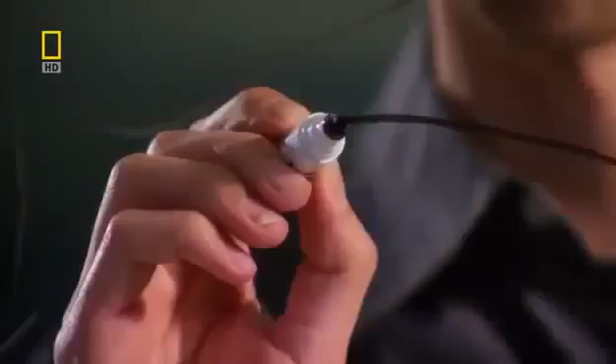The architects look for inspiration in Abu Dhabi's landscape. They find it in the wind-swept dunes and the rolling waves of the Persian Gulf. We took this idea of wind and water, which are both dynamic, fluid type of rhythms of nature, and we said, how can we capture those in time? As a result, you get a much smoother phase.

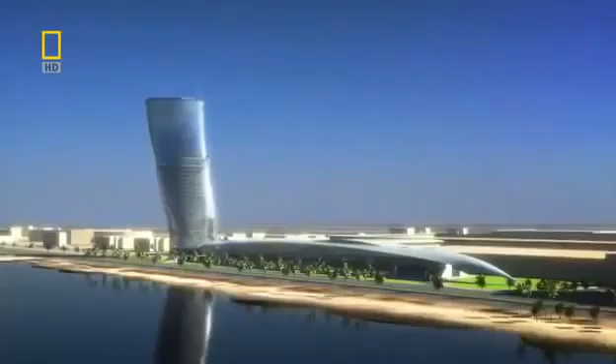I was really very happy when we first saw it, because with such a building, you get the first impression from the first few seconds. The team come up with an extraordinary design. A tower that spirals out of the ground to 160 meters. Inspired by a desert whirlwind and the splash of a wave rising over the sand.

This gravity-defying skyscraper tilts almost 5 times more than Italy's Leaning Tower of Pisa. No single angle of this tower is the same as another. It's a structure guaranteed to amaze. We really wanted this to happen. They could see a vision suddenly. They could see something that would stand for them. Then there was no stopping us.

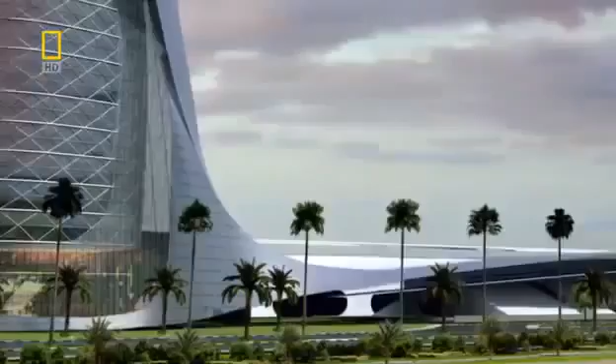Sheikh Sultan wants the lower floors to become the most prestigious office address in Abu Dhabi, with the top 18 levels assigned as a 5-star hotel fit for royalty. But for maximum impact, this landmark skyscraper also needs a prestigious location.

The Sheikh decides the tower will stand next to a monument of national importance, the Grandstand. Built by his uncle and founding father of the United Arab Emirates, Sheikh Zayed, it's used to this day for national celebrations. This monument and the skyscraper will link Abu Dhabi's future with its past.

Over the past 50 years, this land has experienced extreme change like no other. The discovery of huge oil reserves in 1958 set the wheels of progress in motion. Abu Dhabi's ruler, Sheikh Zayed, had a vision to unify the sheikhdoms and secure their financial future from Western dominance. He then set about using his black gold to create a city that rose out of the desert.

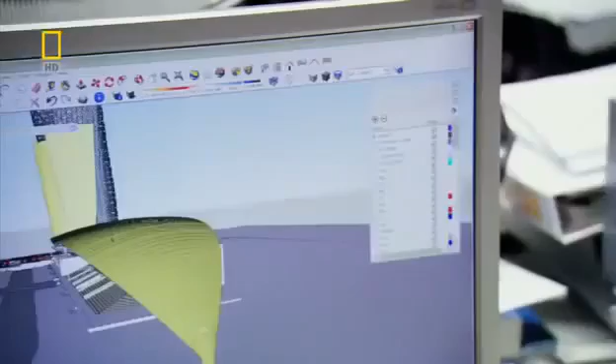Now, the idea must make the leap from the drawing board to the construction site. The only problem is, no one has ever attempted a skyscraper like this before. Everyone realized that this is a crazy structure to build, and how are we going to build it? To make Capital Gate's gravity-defying design a reality, it'll take some extraordinary engineering, and the challenge begins on day one. Its top floors overhang its base by 33 meters, creating huge forces that want to rip the building's foundations out of the ground.

At the construction site, project architect Tony Archibald is daunted by the task ahead. When I first joined the job, I was shown the drawings, and I kind of did a double take, and I wasn't quite sure that I got the correct understanding of the project, and it took me a few moments before I realized what we were about to undertake.

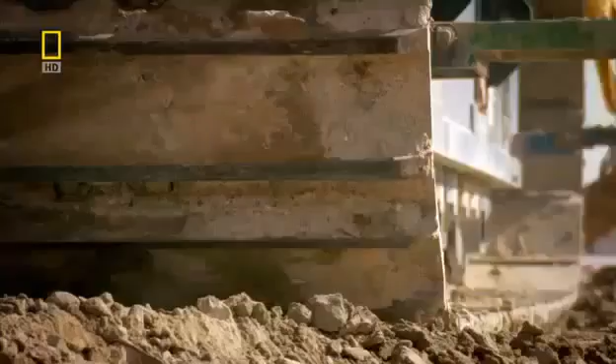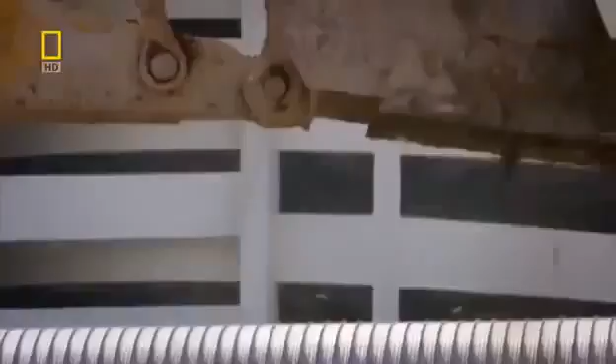Keeping Capital Gate upright is a huge engineering challenge. There isn't just one solution. To overcome the forces of gravity, it will take a whole range of pioneering techniques. But the task starts with the foundations, deep underground. On one side of the building, the weight is going down into the ground. On the other side, it's being lifted out of the ground. And that's due to the large overhang that we're having to deal with.

The solution requires almost 400 concrete piles that work in 2 different ways. On the leaning side, half of the piles push the overhang's forces into the ground. On the opposite side, the remaining piles anchor deeper into the bedrock. They resist the stretching forces, trying to wrench the building out of the ground. Finally, to evenly distribute Capital Gate's forces into the piles, a deep concrete slab reinforced with steel is laid on top. What the foundations taught us is that every single aspect of this building has to be custom engineered.

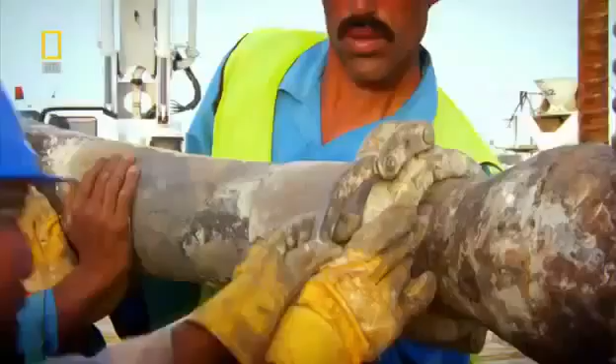Excavators dig out a colossal 6,000 cubic meters of sand. And over 8 weeks, hundreds of piles are driven into the ground. We had an awful lot of piles to put in a very close proximity. It was a real difficult challenge. There can be no let-up on this schedule. Sheikh Sultan wants Capital Gate complete by an impossibly tight deadline.

In less than 2 years' time, Abu Dhabi will host the World Future Energy Summit. Over 3,000 delegates from 50 countries and the world's press will convene at the neighboring Abu Dhabi National Exhibition Center. It's the perfect opportunity to showcase Capital Gate and prove Abu Dhabi is at the forefront of innovation.

But this gives the team just 24 months to design and build a unique skyscraper. With the foundations finished, building above ground can begin. But because of the dramatic lean, it will have to be constructed in a very different way to a conventional skyscraper. We realized once we'd done the foundations that this was going to be the first of many difficult problems. A normal skyscraper requires a solid core to hold it upright. But Capital Gate's curves will just crack and topple a standard core. Engineers must discard conventional thinking and devise a way to defy gravity.

Inspired by the nearby desert landscape and its wind-shaped dunes, architects have designed a curved leaning tower. But it'll take some audacious engineering to stop Capital Gate from falling over. Normal skyscrapers are built around a slim vertical core, which helps to channel the building's weight into the ground. There's so much overhang on this building, meant that a conventional core, there was no way it was going to work. You just can't build a straight core. It's just not strong enough.

Capital Gate's design would cause a conventional core to bend dangerously. The pull of the massive overhang wants to stretch the core on one side, causing the concrete to tear apart.

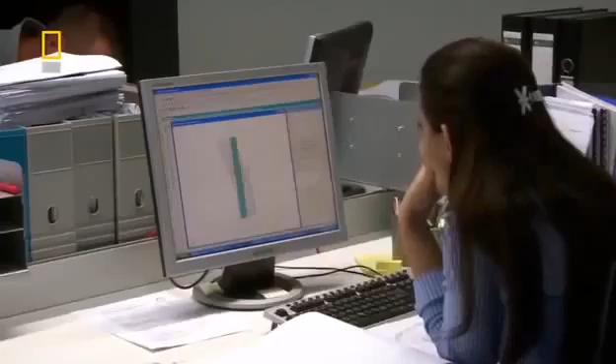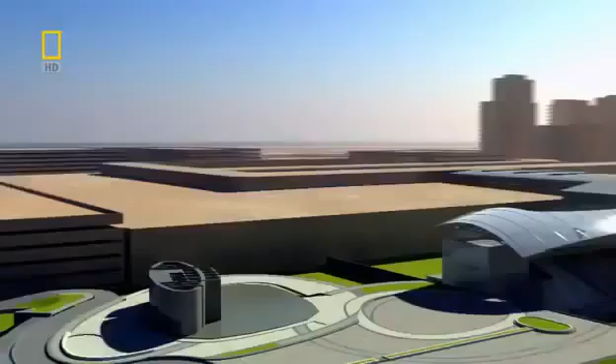The engineers developed two groundbreaking solutions. The first part of their plan is to build the core with a curve, bending in the opposite direction to the building's lean. As the structure grows, its weight pulls the core straight. In total, it shifts 350 millimeters, and the effect is significant. The concrete that would have been stretched by the overhang's pull will now be compressed and strengthened. You build it bent, and then as you add the slabs to the upper levels, it pulls it back into vertical. So basically that whole vertical core is in compression, and that gives it immense strength.

The core grows 4 meters a week, and construction manager Les Fairchild is in charge of building it. This is probably the most complex core that I've come across. It's built at an angle, and effectively the core holds the whole building up. The core is built using a technique called jump forming.

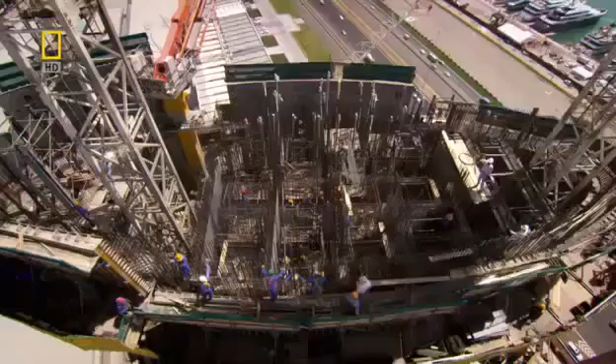First, a dense mesh of steel reinforcement is assembled. A mold then closes around the steel to form the shape of the core. The steel mesh is then filled with concrete. Then the mold or form can climb up the core wall for the process to start all over again.

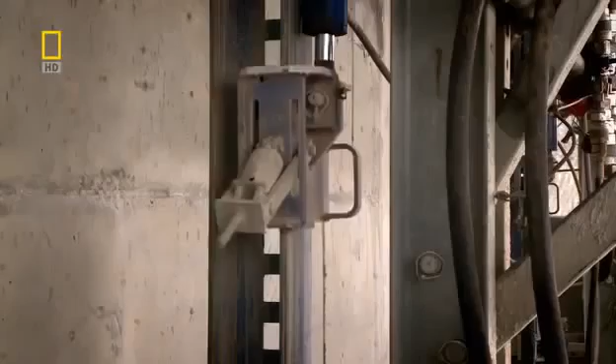Jump form is a hydraulic platform. Once we've cast each 4-metre level, we simply attach it to some runners and we jump it hydraulically up to the next level. The core will be strengthened as it straightens. But for the core to carry extreme loads, the concrete must be reinforced using steel rods called rebar.

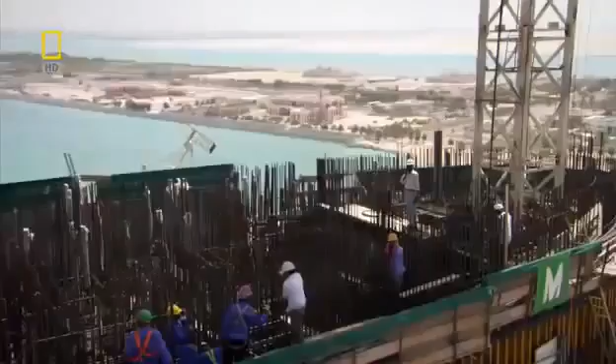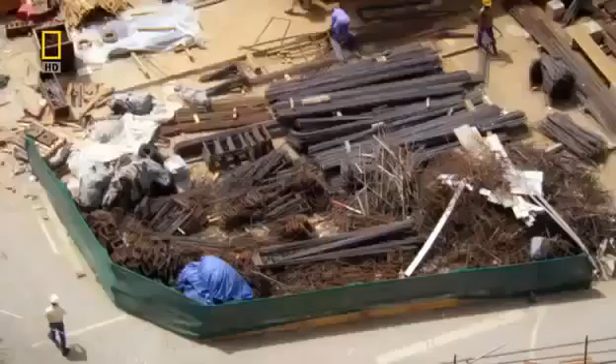The rebar is installed during the daytime, but temperatures of up to 50 degrees Celsius and concrete don't mix. It dries too fast and could crack. To set at the right speed, the concrete has to be poured during the cool of the night. As the core grows higher, the liquid concrete has to be pumped over longer and longer distances. So the consistency of every batch is first checked in a slump test to ensure it won't block the pipes.

When you first see it coming out the wagon, you can usually tell whether it's a tight mix or whether it's a loose mix, and that's what we're testing for really in the slump test. We simply make a cone, lift the cone off, and depending on how much it reduces in height, tells you exactly what the slump is. The one we just witnessed is 215 millimetres, which is within the specification, so that's good to go.

Whilst the truck drives to the pump, Fairchild needs to get onto the core. He can take the stairs, but 90 meters up is a long climb. He knows a much faster way. Crane lift.

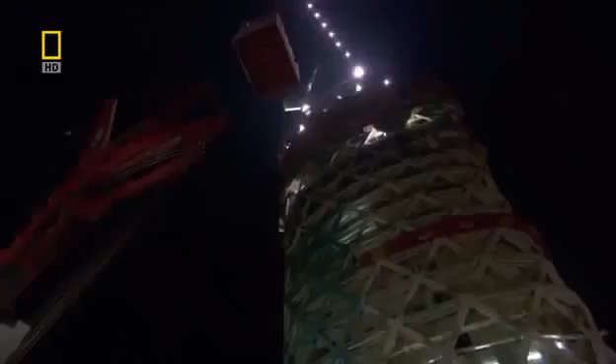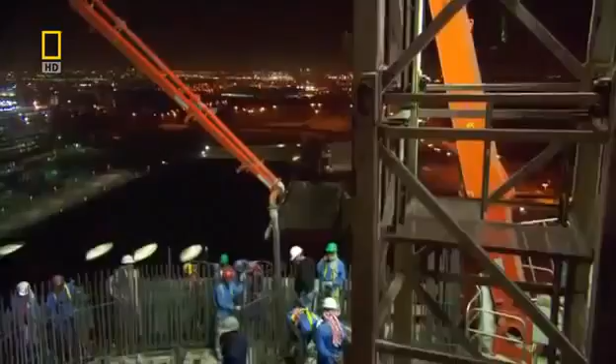Going fairly well. We've had a nice continuous supply of concrete and we're now pumping it up to the upper levels of the building. And the lads are just steadily working away. They actually work from one side to the other in metre deep layers, so they're doing everything right. It's always exciting when we pour concrete. It means it's another achievement really. We're going up another level.

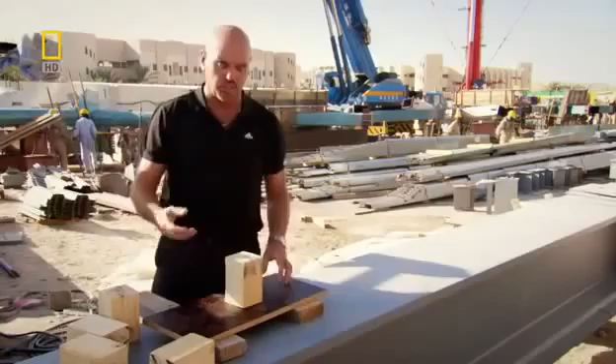But building the core out of alignment and packing it with rebar still isn't enough to stop gravity toppling Capital Gate. What we came up with is a post-tensioning solution where we introduced much more reinforcement into the core wall and then used a tensioning process. Basically that was done by introducing high tensile strands to the centre of the walls. When we reached the designated height, we simply applied tension.

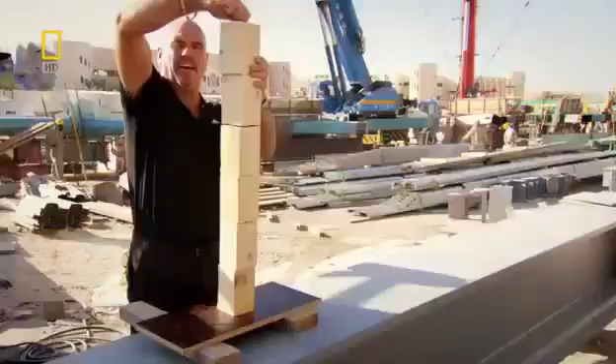We're actually stretching the tendons that fall through the wall and we're actually pulling them tight, and that's done by a tensioning machine. So effectively, when the tension is complete, when the load was applied to the core, it would stay intact and the additional reinforcement would prevent it from falling over.

To post-tension the core, 146 steel tendons are threaded vertically through the concrete. Each tendon is 20 meters long and runs through 5 floors of the building, overlapping each other for maximum strength. When the tendons are stretched, the stress counteracts the pulling force created by the massive overhang, stopping the concrete from tearing apart.

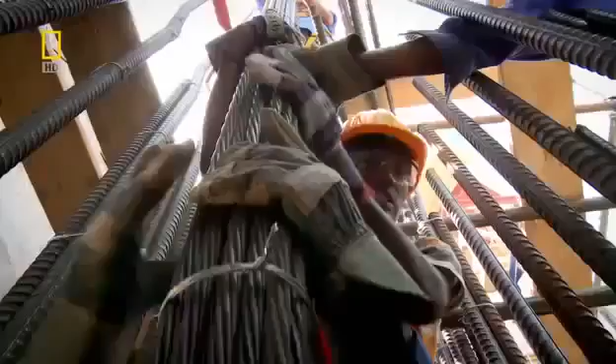On site, the team are post-tensioning the core. But no one has ever attempted this vertically in a skyscraper. The long tendon is lifted to the top of the core. The team use the steel tendon's weight to force it through a duct already cast through the core. Once the tendon is in position, the team lock off both ends, ready to tension its individual strands.

Okay. A hydraulic jack clamps around one strand at a time and stretches it. It's equivalent to about 5 family cars pulling on one end of the rope. With the steel tendon now stretched to the right stress level, concrete pouring can continue upwards.

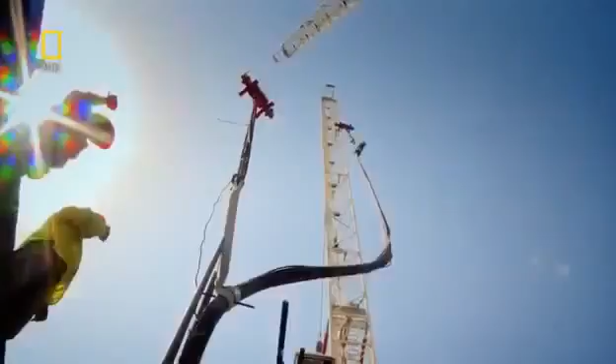The quantity of cable that's been used is approximately 120 tons and 120,000 meters in length. It's about 44 times the Golden Gate Bridge. This process is repeated over and over and means the core should withstand the huge loads generated by Capital Gate's extreme overhang.

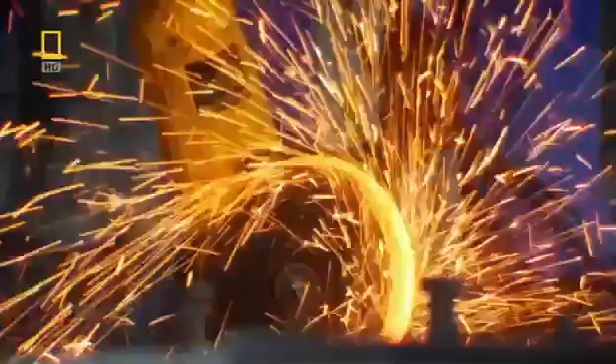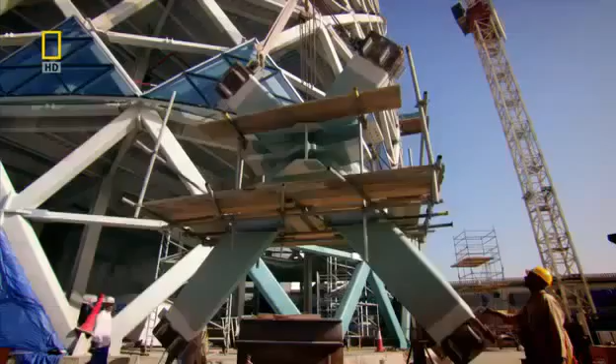But now, an even greater challenge must be tackled. The building's twisting, leaning design must somehow be turned from theory into reality. And once again, it'll mean bending the rules of architecture. To create Abu Dhabi's architectural icon, Capital Gate needs an exterior curved leaning frame. But once again, the building's extreme tilt creates a problem.

The shape of the building with this very pronounced overhang meant that traditional skyscraper building solutions just weren't going to work. There's no way. The building design requires it to be thin to maximize floor space and allow for huge panoramic windows. Irfan Ahmed is one of the engineers who has to find a solution. For structural engineers, always it's challenging to accept the architectural requirement, you know. They always want thinner and thinner and thinner.

Surprisingly, the humble chicken could help with this engineering dilemma. It is essentially a skin of structure around the outside of the building, not unlike an egg. An egg can withstand huge loads because it evenly distributes forces down through its shell, which means the shell can be thin, creating more space inside. So it's very, very thin, it's very, very strong. If I try to crush this egg, you can see that it's actually amazingly resilient. So let's see how resilient.

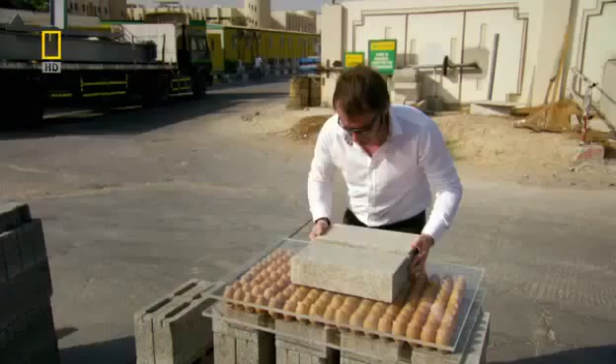Here I have 170 eggs laid out, and we're going to put load on top of these in the form of breeze blocks. Moment of truth. So far, so good. Each one of these blocks weighs 15 kilos. So we've nearly got half the weight of a car on here now, on our 170 eggs. Let's see how far we can push this. That's 30 blocks, and I think it's about to go. It's going big time now. This is it. This is the end.

A diagrid is a giant mesh of steel that wraps around the core. Steel beams connect to a node or joint to form a cruciform section. 720 uniquely shaped sections link together to form the thin but immensely strong diagrid. Working together, these cruciforms equally distribute the forces down the outside of the building. The way it does that is by making a uniform net, so that the forces are very evenly distributed, and that means that we can get away with slenderer sections.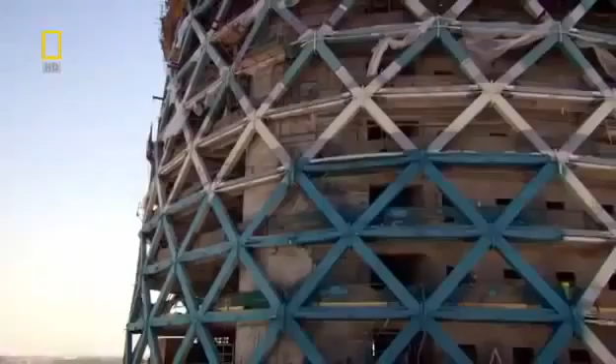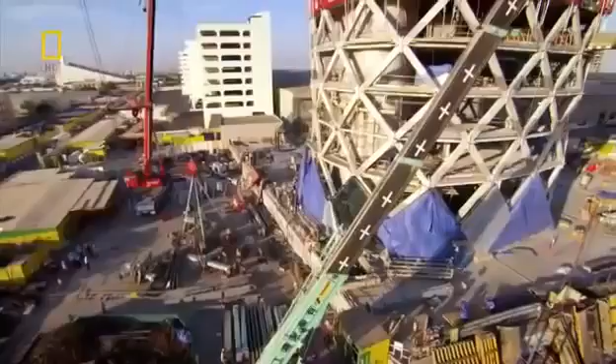On site, a team of 240 steel fabricators assemble the diagrid. They've built the easier straight part of Capital Gate's base, but now the structure is starting to lean, making installation even more challenging. Each cruciform, weighing up to 16 tons, has a unique geometry and must be crane lifted at a precise angle. If the diagrid is not assembled with millimeter accuracy, the mesh will not channel the loads and the structure could be weakened.

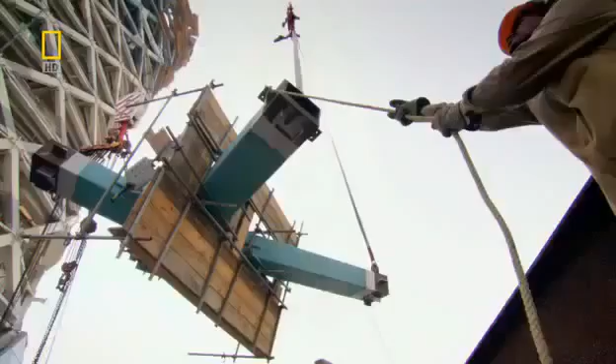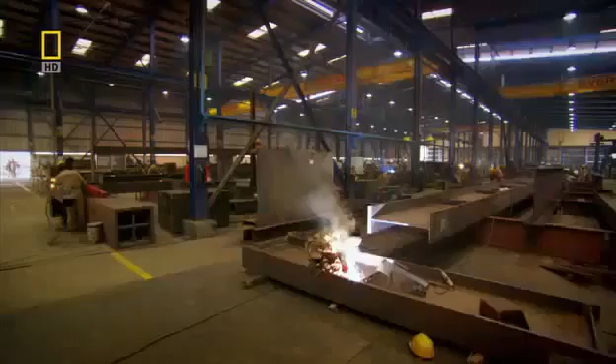The engineers must communicate closely with the expert steel fabricators. They design and manufacture the diagrid 150 kilometers away in the neighboring emirate, Sharjah. Here, cutting-edge construction is the norm. They've built one of Malaysia's Petronas Towers and Dubai's iconic skyscrapers, the Burj Al Arab and the Burj Khalifa. But Capital Gate's revolutionary design pushes even these experts to the limit.

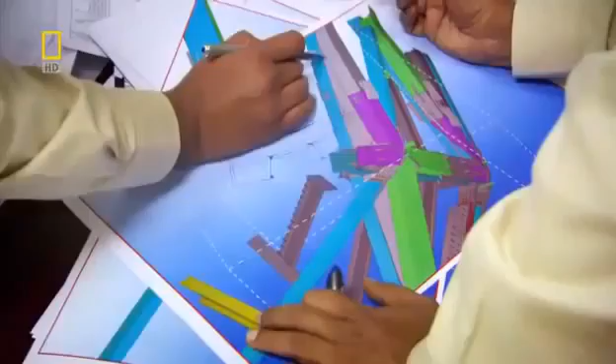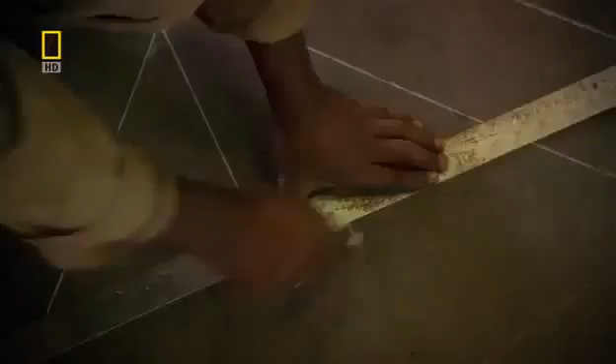On the planning floor, project engineer P. Bhaskaran and his team need bespoke 3D software to tackle the building's highly complex diagrid. The 3D modeling is done, and any unforeseen criticalities will be very clearly identified in the 3D model. Each one of the 720 cruciforms is precision engineered, not only to channel huge forces, but to connect with millimeter accuracy to the neighboring cruciforms and the glass facade. But to measure their exact angles, the team used some old-school technology: chalk. It might look unsophisticated, but it's highly accurate, ensuring all the elements will join together.

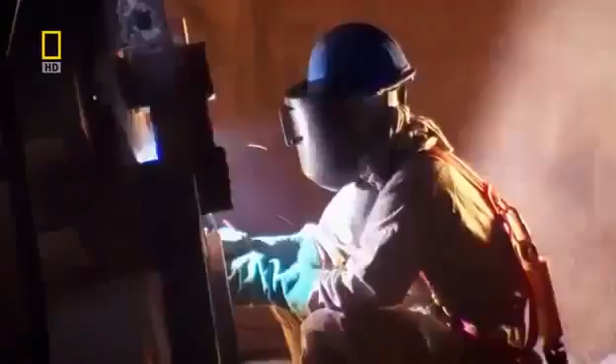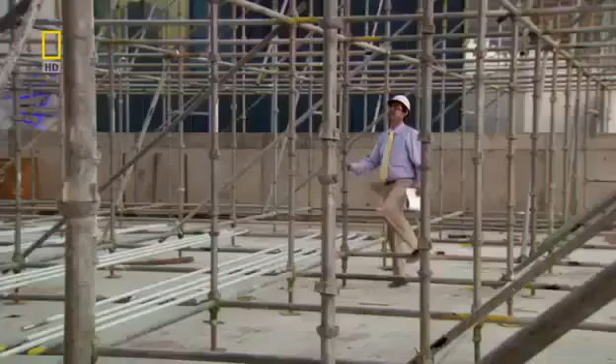To keep up with construction, the factory must produce 18 cruciforms every week. Constructing such a huge building, a critical building within the short span, without working 24 hours, it is absolutely not going to happen. As the skyscraper reaches new heights, the long hours start to pay off. This design pushes the diagrid technology to its absolute limit, and in fact far beyond what's ever been achieved so far. Even in your dreams, you're thinking about this project. So once you see the structure coming up, you forget all the long hours you spend and all the sleepless nights.

A colossus is fast emerging from the Abu Dhabi sands. Now, this leaning tower must be clad with a glass facade. And as always with this gravity-defying structure, it's going to require some revolutionary engineering.

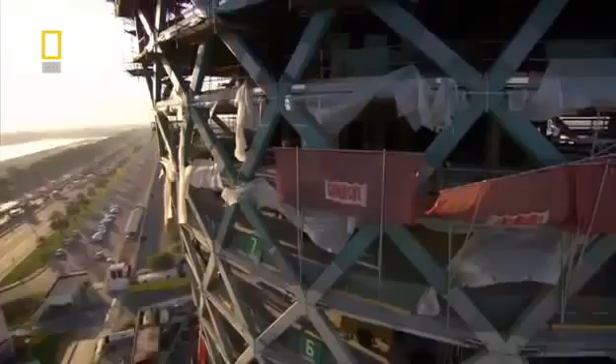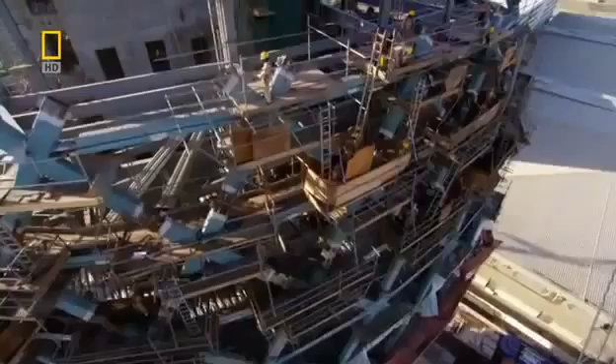Glazing Capital Gate's leaning curved frame is a major problem. Covering its unusual contours with curved glass will blow the budget. So the skyscraper's curves must somehow be clad using cost-effective flat glass panes. Fortunately, ancient Greek geometry can help.

Because you've got a complex shape, it's an organic shape, it's a curved shape, the only way to model that with straight lines is to use triangles. Triangular panes can pivot in 3 directions, and when joined together can cover complex geometric surfaces. But because every angle of the building is unique, it'll take 26,000 triangular panes to form the facade.

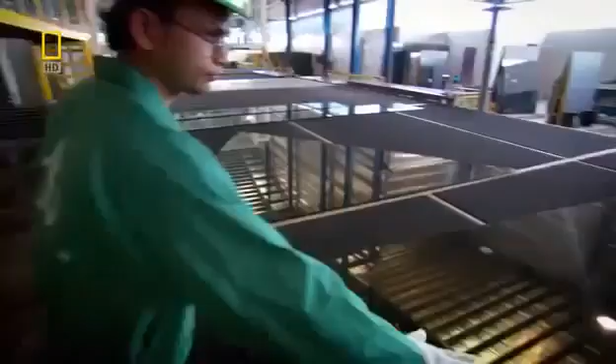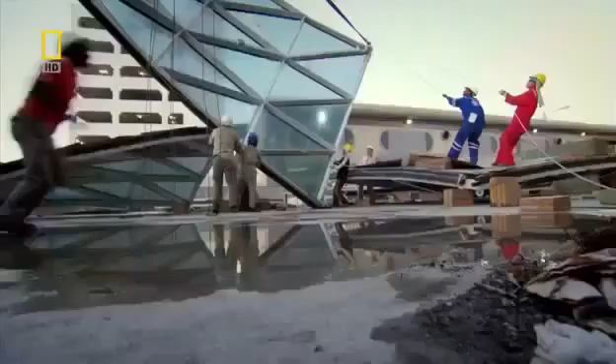With so many glass triangles to cut, the local glass factory springs into action. Each pane is scored by an automated diamond cutter to an exact pattern. The triangles are then sent along the production line. The team is under constant pressure to deliver enough glass to the site. Hey, this side, 2 guys, hold it. After several weeks, 8 diamonds are in place and another 100 standing by.

But the glass design is so unconventional, it still has to pass a number of tests to prove it's up to the job. Because we'd already started the glass installation, the results of this test were absolutely key. Each panel is stacked one upon the other. So if we'd had any kind of problem, we would have had to unstack them, which would have had disastrous consequences for the program.

This is no ordinary glass skin after all. Capital Gate's core straightens as it grows. The skyscraper will not stop moving until after completion. Normal glass facades can accommodate minute movements caused by wind and temperature changes. But to stop the glass shattering and keep the building watertight, the panels must be designed to shift by up to 20 millimeters. The scale of that kind of movement is almost unheard of in glazing systems. It's a vast amount of movement.

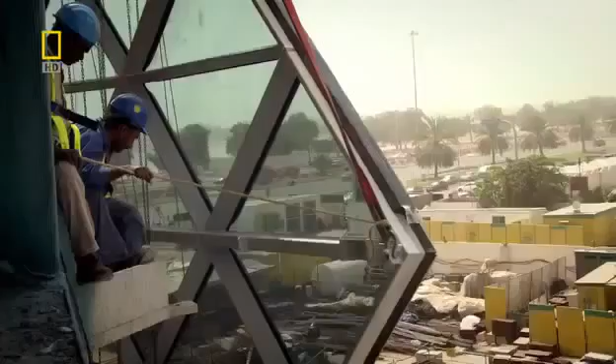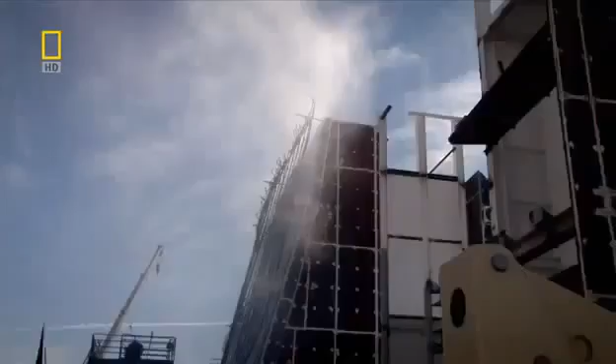With glass installation ongoing, construction manager Craig Rooney needs to know the panels will perform. We don't want to get to the top, we've done it, we've installed it, we think we've done a great job and then it all leaks. The panels must be tested to the limit at a Dubai laboratory. A plane engine and many liters of water simulate worst-case scenario weather.

Now the moment of truth. Any leaks could be a disaster. And it's bad news. The first time we got a full water test, we had a leak. The fact that we had a leak was devastating to the whole team and very alarming. The diamonds connect to each other by a bespoke two-layer seal. The flexible spongy seal allows the diamonds to move and keeps water out. But if any water does seep through the outer seal, drainage tubes fitted at intervals let the water flow away.

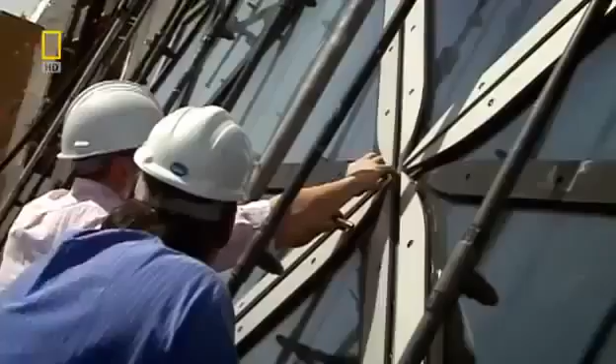The panel has failed the test. Water has flooded inside and penetrated the inner seal. If it was a fundamental failure, we're back to the drawing board, so the cost and the budget and the program all go completely out the window. The panel is examined. Answers are needed fast. Fortunately, it's not a design failure. They discover a drainage tube is only blocked with sand. The problem resolved, installation can step up a gear.

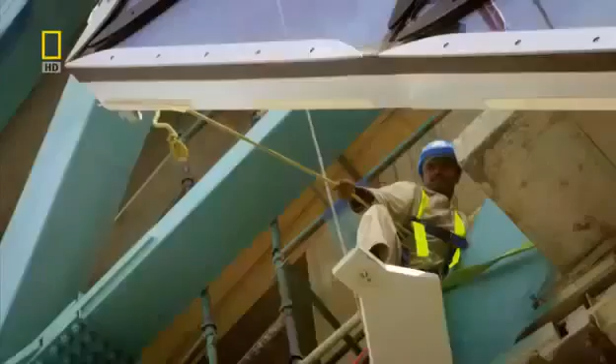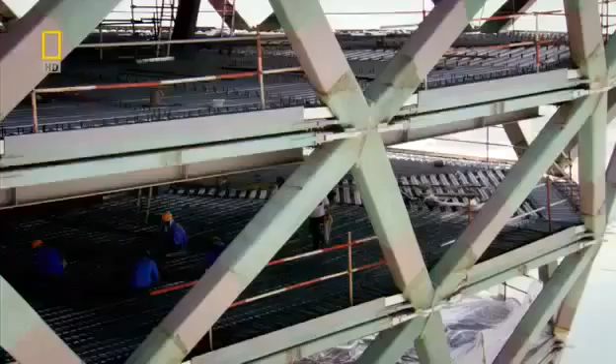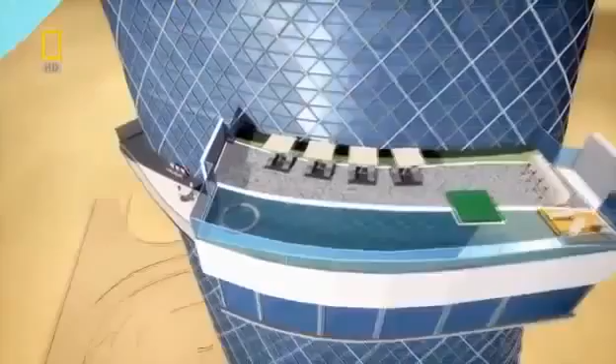But as always with this audacious building, one problem is solved and another is just around the corner. To give Capital Gate's five-star hotel lobby the wow factor, architects again plan to push the design to the extreme. Now they want to build an infinity pool and a restaurant, hanging 100 meters above the ground.

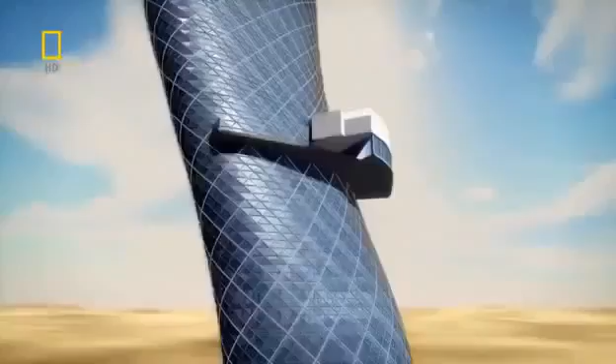18 months into the build, Capital Gate's design is about to give a new slant on high-rise living. The architects want a pool deck and restaurant suspended in the sky, but it's an engineering headache. There's so many requirements that architects have that really put us in so much trouble as engineers, but you want to make sure you have a safe structure. The design calls for a two-story extension, hanging without any visible support. But the pool's water alone will weigh 150 tons.

The structure's huge mass means it needs reinforcement. We needed some supports from below, otherwise there was no other solution. I don't think you can have a cantilever that huge on this building, no way. The design will only work if it's underpinned with 22 steel struts. They will carry the loads back into the building. But the struts must also look delicate to meet the architect's aesthetic demands.

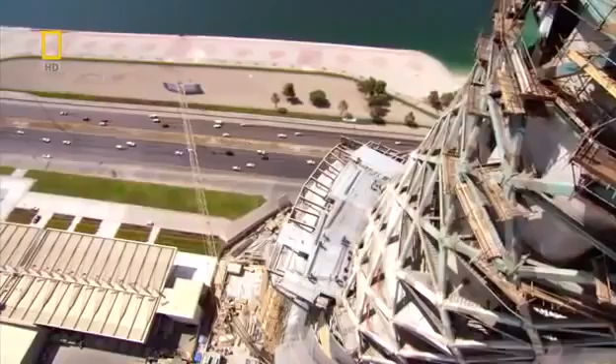On the construction site, 90 meters up, the pool and restaurant is taking shape. All of its structural elements are in position, except one. The team are raising its last 6-ton floor beam.

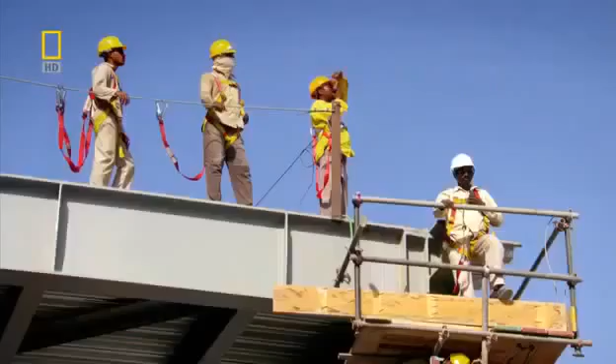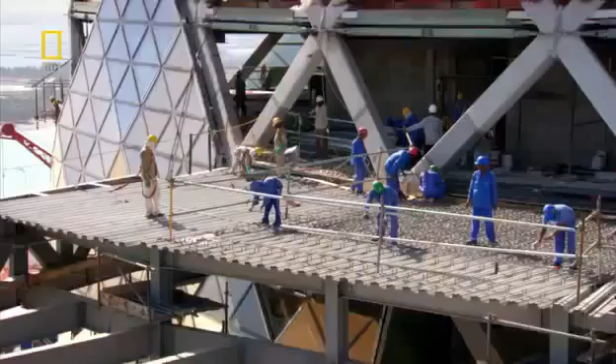It's taken many crane lifts, but one of the highest suspended swimming pools in the world has made the leap from blueprint to building. See all those lines that you just drew? They're actually drawing the same thing for you, but with a crane. But the feeling is indescribable.

And the structure's muscular struts and connections are also elegant. The idea behind these junctions is that they behave like the insects that can walk on water. They're sufficiently light that the surface tension keeps them above the water. So these little brackets dissipate the forces from all that weight.

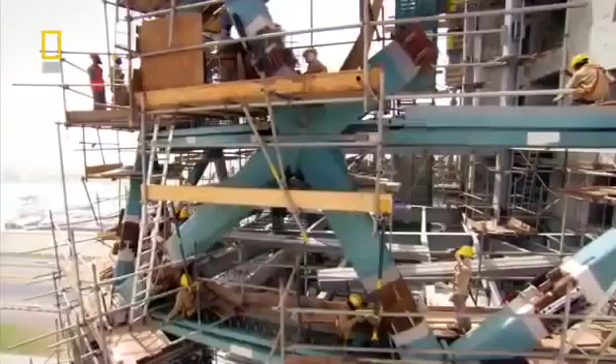Capital Gate is fast becoming an Abu Dhabi landmark. But the taller it gets, the more the weight of its upper floors is a problem. The skyscraper needs to go on a diet. And this time, the architects come up with a clever solution. The building has lots of visual surprises.

And one of the most important ones of those is the internal atrium. It's a kind of a light well that brings light from the sky deep inside the building, and it extends over half the height of the building. So it starts out very, very small at the bottom and opens out in a big funnel. This cavernous hole is good news for reducing weight and minimizes forces.

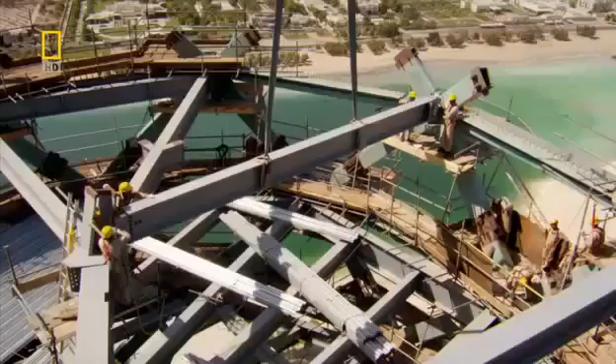But the atrium is a double-edged sword. The floors are critical in transferring loads from the diagrid to the core. A giant hole through 18 floors means these loads must find another pathway. It's a very, very big hole in every single floor plate. So our engineers really have their work cut out.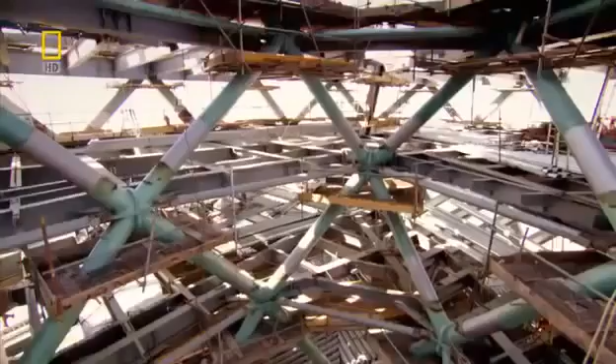You don't want to have an opening in your floor. You want to have more concrete, reinforced concrete, to transfer these forces. The forces need to flow away. And the solution is pioneering. An internal web of steel mirroring the external diagrid. This is the first time we've ever heard of this being done.

The internal diagrid is actually a fundamental part of the structure. This funnel-shaped internal skeleton carries the forces of an 18-story building down to its tapered base and into the core. But the loads are extremely high for such a small area. To stop the atrium punching through the core wall, the concrete needs protection.

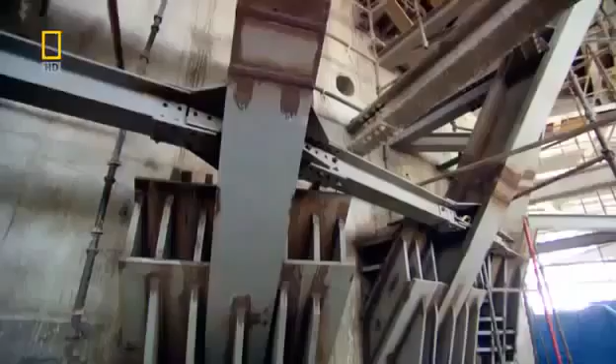The answer? Six giant plates of steel that brace the connection to the core wall. The connections are really a wonderful, wonderful piece of engineering. They're 8 meters high. They span 2 floors, and they connect back into the core. The atrium's near completion brings Abu Dhabi one step closer to achieving an iconic landmark. But as the sun goes down, this isn't the only celebration underway.

On site, the Indian steel team are holding an annual blessing to the Hindu god Lord Vishwakarma, the protector of architects and engineers. Their livelihoods depend on staying safe, and although they use safety equipment and are highly skilled, working with huge sections of steel at height is never risk-free.

We pay our respect to God and get the blessings from the God. We do that for the safety of all our workers and for the proper completion of the job. Every trade of workers we take, the basic tools they are using on site, that has to be just kept in front of God, and the workers, they feel themselves that they are in safe hands. The tools are now blessed, and the steel team's morale is high.

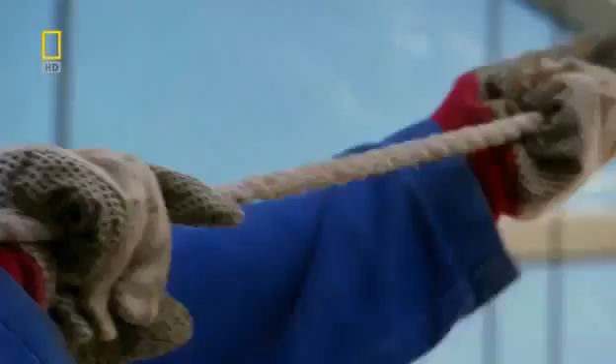But the glass installers, lifting diamonds to over a height of 100 meters, are getting the wrong kind of lift from Abu Dhabi's highly unpredictable wind. If the wind is too strong, then you can feel this in your hands when you hold these diamonds by rope. I always get nervous if I see the panel starting turning. And this makes me always a little bit afraid when I see diamonds going up and starting moving.

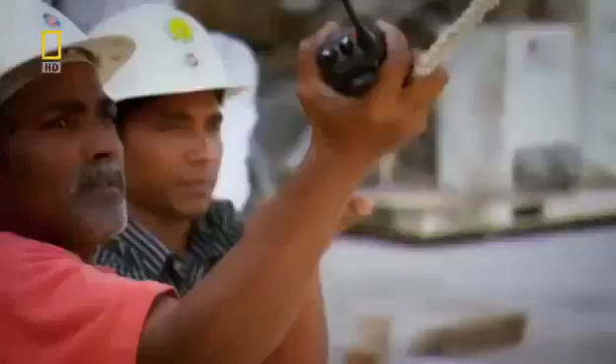Meyer has to act quickly, or this 4-ton diamond could smash into the building. Not for the first time, lifting glass is delayed by changeable weather. At this rate, Meyer won't install the remaining 107 panels in time. But Abu Dhabi's wind isn't the only problem the Capital Gate team face. A last-minute design request comes in from the Sheikh's office that could have serious implications.

With just 6 months to go to completion, the Capital Gate team should be on the home straight. But those plans may have to be put on hold. I had a telephone call saying that we had to put a helipad on the roof, which I didn't think was a joke, but I was astounded that we got this at such a late point in the project.

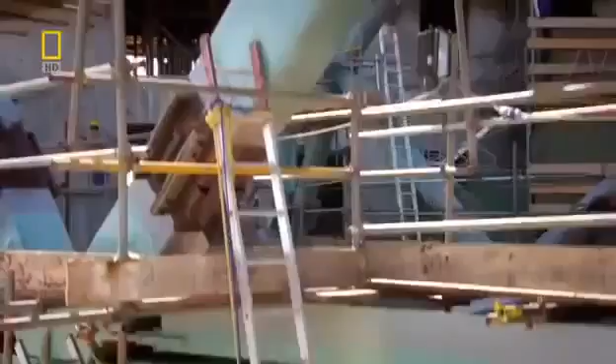Integrating what will be Abu Dhabi's highest helipad atop one of the world's most daring skyscrapers at first seems a simple request. But it actually poses 2 serious problems. It'll create new forces that must be absorbed by the already strained core. And unpredictable wind flows that can cause potentially lethal flying conditions. You get a thing called wind shear, tipping the whole helicopter onto its side. And this is a very real and very dangerous risk.

These rapid wind changes, known as wind shear, can affect the lift on helicopter blades. Aircraft can be blown off course, or literally fall out of the sky. There is no way that we could have any margin of error on the safety. The only way we could predict what the wind shear would be like on the top of the building was to model it in a wind tunnel.

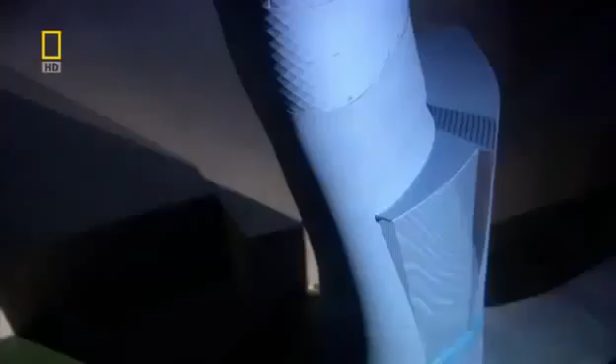In London, England, a scale model of Capital Gate is put through its paces in a high-tech wind tunnel. Just as the team fear, within seconds, wind shear conditions appear. Air currents are flowing over the top of the building, but then separate from the surface, spiraling inward to form a realm of turbulence.

Wind engineer Leighton Aurelius knows the consequences could be serious. If the pilots lose control in this random ball of energy here, they may in fact end up crashing onto the helideck, or even worse, onto the tower itself. I'm sure that can occur. But that's not all the wind tunnel test reveals.

Wind impacting the helipad is also creating huge suction forces. We're talking about very large forces here wanting to pull the helipad off the top of the building. Something in the realm of several large trucks or big rigs trying to pull this helipad away.

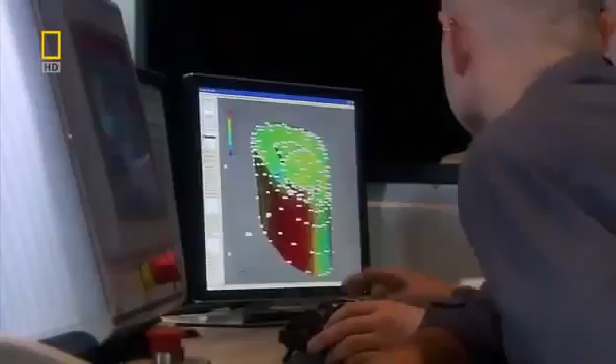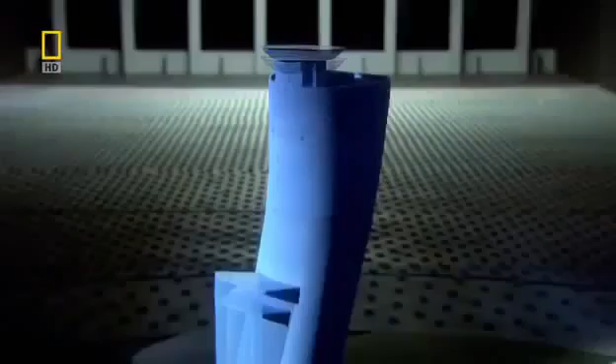To make the helipad safe, Aurelius and his team have to go against conventional thinking. We didn't think that lowering the helipad was actually going to be the optimum design, but we see reduced loading on the helipad as well as safer conditions for the pilots to land in. Lowering the helideck to just 2 meters above the roof dramatically decreases the wind shear threat and means Capital Gate's core will withstand the additional loads.

We're relieved, frankly. The tests have actually confirmed now that we can have it in our original design position, which is very low, which will mean that the profile on the skyline is exactly where we want it. But it'll take another 5 months to just draw up the helipad's blueprints, and a crane must be left behind to build it.

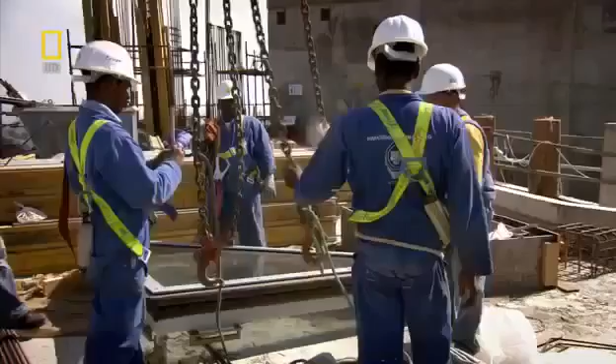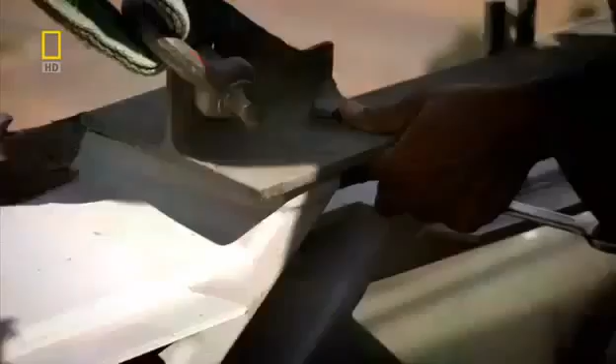Now, with only weeks to go until 0 hour, the team are installing one of the last glass panels. It's a moment that once seemed a long way off. In my office I have a plan of all the diamonds we have to install, and in the beginning it looked like I'm in jail and I'm marking the wall with marks for each day. And so at first I felt I will never finish this project. Just 10 months since the first diamond was fitted, the facade now shimmers in the sun.

Capital Gate's internal fit-out will take another year. Only then will its 5-star hotel and Abu Dhabi's most unusual office address be open for business. But against the odds, the team have created one of the most extraordinary megastructures on the planet. Capital Gate twists and spirals out of the ground, soaring to a full 162 meters. It's taken nearly 6 million man-hours to construct, and its overhang is spectacular.

You see the building and you stand underneath the overhang. It's extremely impressive. It's a fantastic feat of engineering. I feel as though I've been here an eternity, but it's probably been the quickest 2 years of my life. It's been an amazing journey and we've learned so much. And actually I think we've demonstrated that some things that looked impossible or even ridiculous were actually possible.

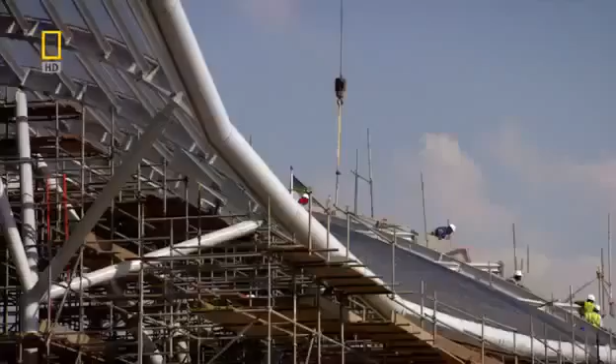And Abu Dhabi's past will soon be physically linked to its future by a wave of steel that'll rise over the grandstand and splash up the skyscraper's mirrored glass. Abu Dhabi is a fascinating part of the world to be at the moment. It says to people we can step outside of the box. We don't have to follow the rules.

With the 2010 World Future Energy Summit just weeks away, Sheikh Sultan can be sure Capital Gate will show the world what Abu Dhabi is capable of. This building is really iconic. It catches the spirit of Abu Dhabi and will be part of the postcard image of Abu Dhabi. The team have achieved what some thought was impossible. A leaning tower that claims the world record for the most inclined skyscraper on Earth.